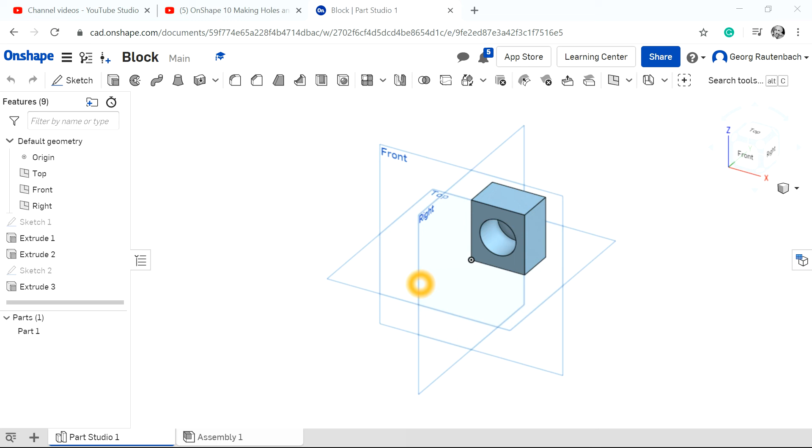So we're gonna go to OnShape and create a new document, and we're gonna remember your name and your surname. So I'll just put name, surname - your name, comma, space, surname - and we're gonna call this one Block80.

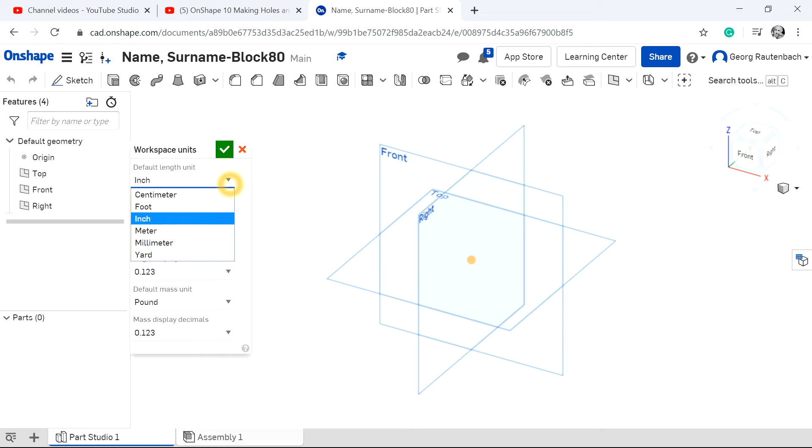You're gonna create a sketch that's called Block80. When you start, remember our first task is to go to millimeters. So you click on your document drop down there, workspace units. It will be by default on inch, so you're just going to go to millimeters and give that a green tick.

Now you don't have to, but I like to hide these planes. If your plane turns orange, you can just right click on it and hide it. You can hide multiple planes at the same time, but I'll just go slow with this one.

Then we're going to choose our sketch icon, and we'll select that plane that we want to sketch on. Choose your rectangle tool, your corner rectangle tool, move to your origin and just start drawing a rectangle there at random size. Then you go back to your measurement tool, grab this line, change that to 80 mils.

So I'll change that to 80 mils, enter on your keyboard, grab this line, pull it away and backspace, and 80 mils there and enter that. Then this is still a flat shape like a piece of paper.

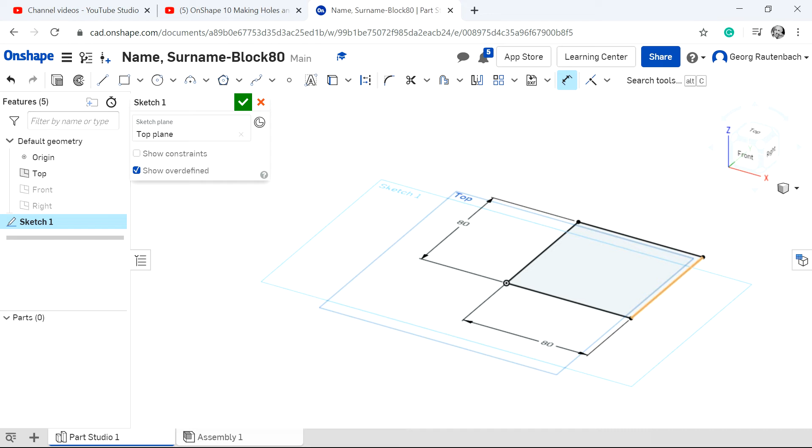Now we're going to go to our extrude tool, and we want to extrude it 80 mils. So we're going to go 80 mils, and then you're going to give that a green tick. So what I've created now is a little block.

If you use the scroll of your mouse, you can scroll back in. Now this block is 80 by 80 by 80, so all the lines will be 80 mils.

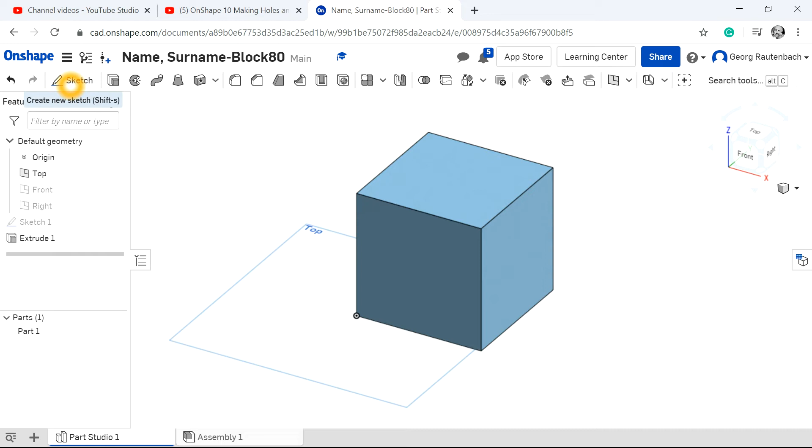Then we're going to have to sketch. I want to cut a hole right through the block, so I'm going to sketch. I'm going to choose the top plane to sketch on first. Then I'm going to choose my circle tool, and I want to get it right in the center.

So I'll just use my line tool quickly, and I'll draw diagonal lines from one corner to another one, and then from this corner to that line I'll draw a diagonal line. Diagonal lines always give you the center of something. So if you've got a piece of wood or a piece of material and you want to find the center quickly, just draw 2 diagonal lines from each corner.

Then we're going to grab our circle tool, put that in the middle of our 2 diagonal lines, click on that, go to the measuring tool, make this 40 mils. So we're going to make that 40 mils and enter on your keyboard.

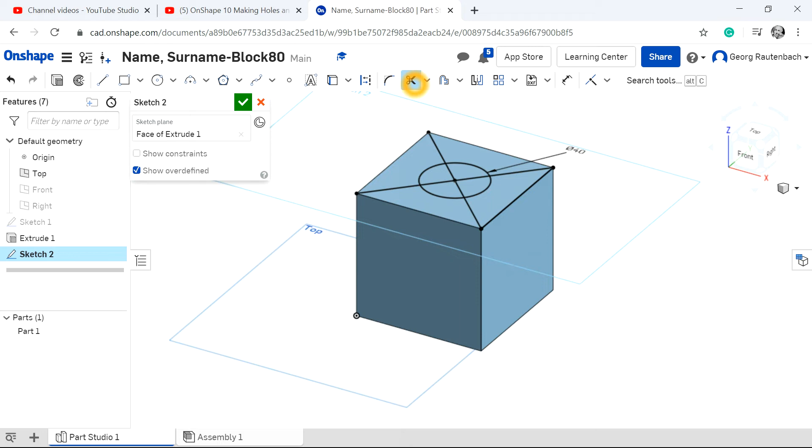Now there's a scissor tool here, that's the same as an eraser. So you grab the scissor tool and we'll just erase the lines that we don't need - we need to erase those diagonal lines that we made to get our center point.

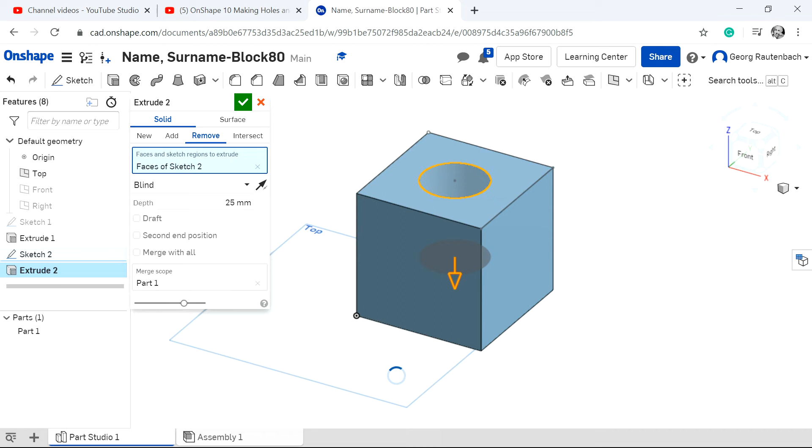Now I want to drill a hole right through, or cut a hole right through my material. I'm going to go to the extrude sketch. Now it comes up with 25 mils there, but what you can do is it says new, add and remove. We want to remove material, we don't want to add material. So if I click on remove and grab that arrow and pull it all the way down my sketch and give it a green tick, I will drill a hole right through the sketch.

Here on your camera options, you can click on the camera options and we can go to our isometric view, or we can go just to the top view to make sure that we've cut right through. And we'll go back to our isometric view, and now I want to make a hole right through on this side.

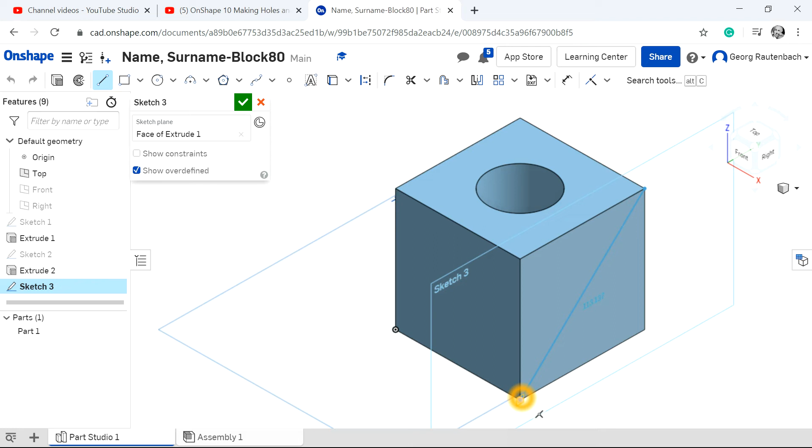So what I'll do, I'll just click on this side, I'll go back to sketch, click on the side again, choose my circle or my line tool first, draw my diagonal lines from this corner down to that corner. If you want to make it easier on yourself as well, click on this plane and you'll get a right view right from the front.

So we'll draw a line diagonally there as well, and like I mentioned with the first diagonal line, that's our center point now. We'll click on our center, draw a circle, go to our measuring tool, and choose 40 mils.

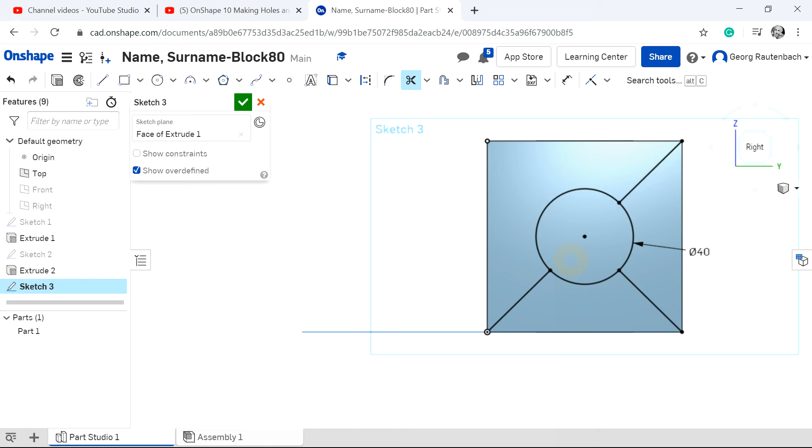So I'm going to backspace that, put 40 mils in there, and enter. Now I've got a hole that's 40 mils, so I'll go back to my scissor tool, which will act as an eraser, and erase all the lines I don't need by clicking on them. They'll just disappear, as you can see. Now I want to cut through that as well.

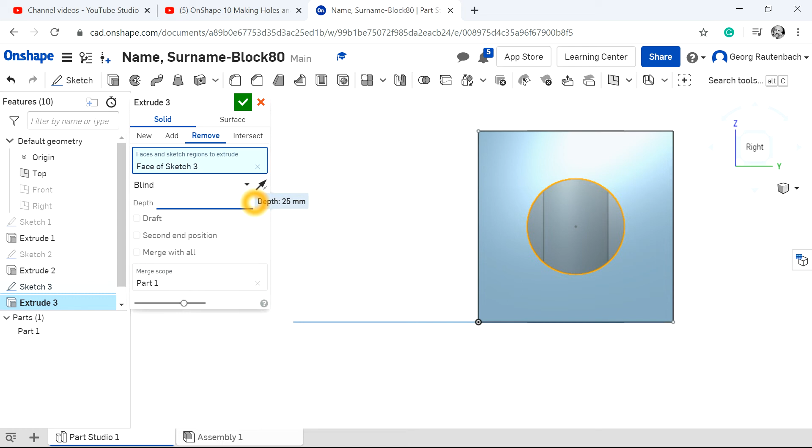So my extrude tool, and instead of adding, I'm going to try and remove. I'll click on the circle there and remove. I'll choose my circle and remove, and I can make this 80 mils. Click on the green tick there, and now I've got a hole of 80 mils.

So if we look at an isometric view of it again, I've got a hole there, a hole right through to the bottom, and a hole right through here. So now I'll click on this side, my front plane, and start again.

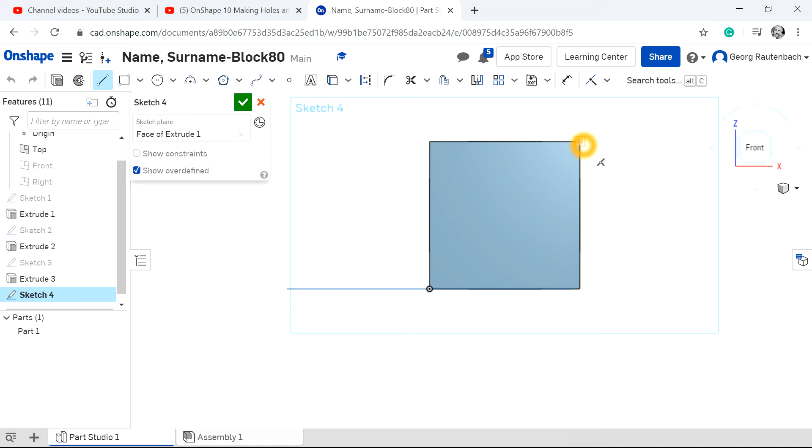I'll do my diagonal line, so sketch and line tool, and then go from this corner right to that corner, and then just draw a line from there to there. Now you'll see the line will keep on drawing - an easy way is to just press escape and it will stop drawing that line.

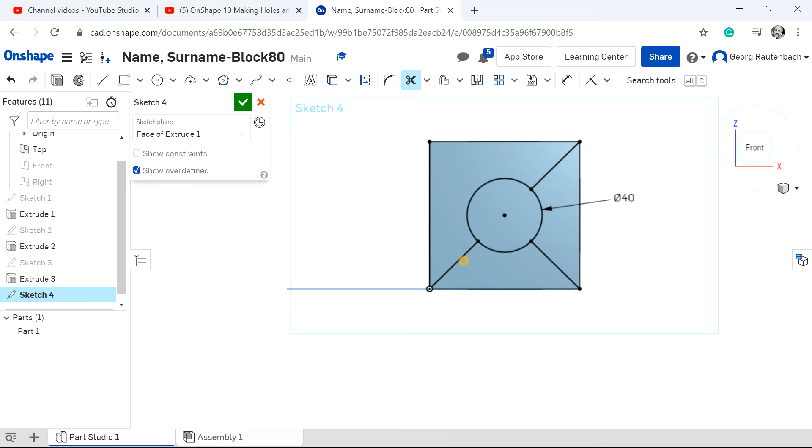Now I'm going to draw in my circle right there. I'm going to go to this dimension tool, change that to 40 mils as well, so backspace, 40 mils, and enter. Now I'm going to go back to my scissor tool and get rid of the lines I don't need, and then I'm going to cut right through it. So I'll go back to my extrude tool.

Instead of adding material, I want to remove material, and I want to make it 80 mils. So I'll click on that 25 mil there, backspace that, make it 80 mils, and enter. Now if I go back to my isometric view, I can see that I've got holes right through each one.

And now, one of the other tools I want us to get used to is the fillet tool. The fillet tool will just make my corners round. It's set on 5 mils - I'll change that to 1 mil, and then on each line you click, it will fillet that line by 1 mil.

If you see the fillet is not big enough, you can change that. So maybe I'll make that 4 mils, and then if I click on this, it will fillet it 4 mils. I'll click on that one, so I'll go back to my fillet tool and make sure I change that back to 4 mils.

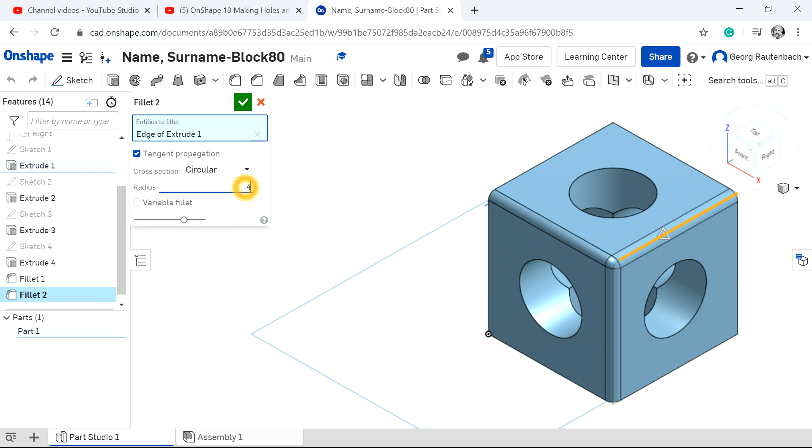And then I'm going to click on all the lines I want to fillet. So you can go through your whole sketch and click on all the lines you want to fillet, and that will give you a nice fillet on all the lines.

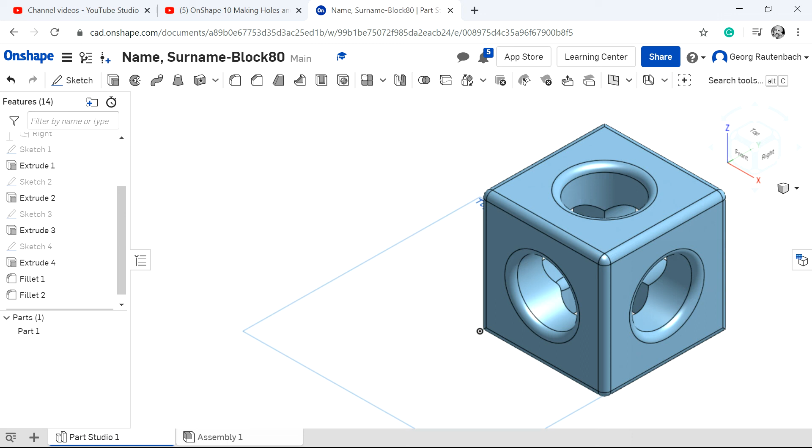Fillet is basically the finishing off of a line. So when you're working on a piece of material, you always want to kind of sand the ends a bit around, and that's what fillet does for you as well.

I'll just have a look here. So we've filleted all the corners and all the holes, and that's basically our first exercise.

Have a go at this, see if you can do it. Remember, 80 by 80, the holes are 40 mils, and you can fillet more - you can fillet those lines there as well.

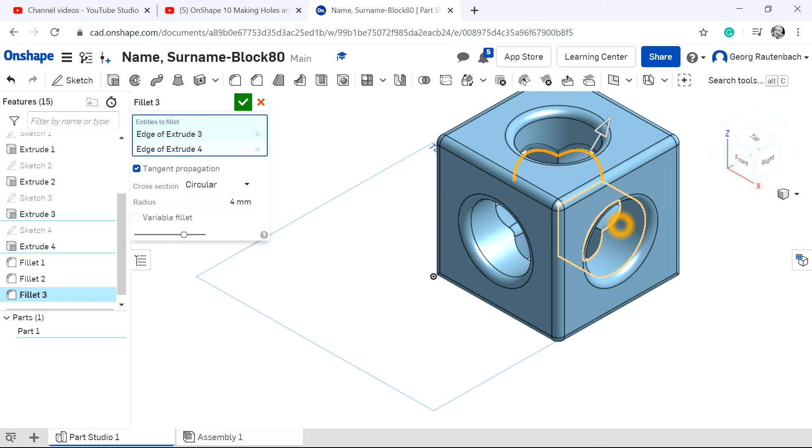So if you go back to your fillet tool, you can change the fillet dimension to 4 mils, and then fillet those insides as well if I want to, like where the holes meet each other, and then give it a green tick, and it will fillet basically everything on our little sketch.

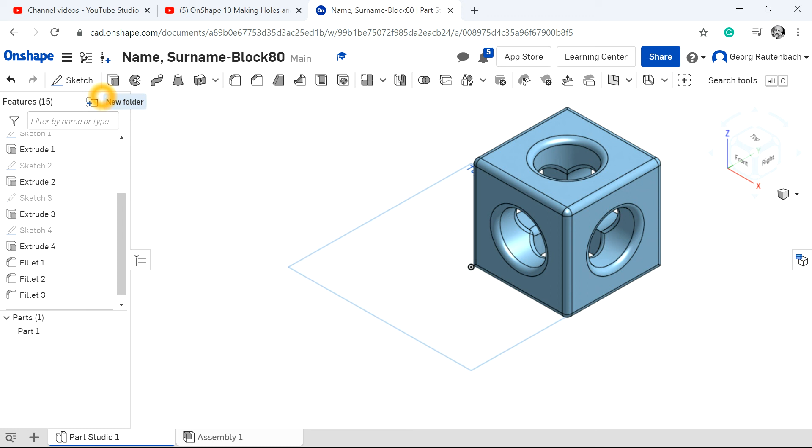So have a go at this exercise, stop and rewind, and if you struggle, please try again. Or if you press Ctrl Z on your keyboard, it takes you one step back. So Ctrl Z is one step back, or here on the top there's a back arrow like on a Word document.